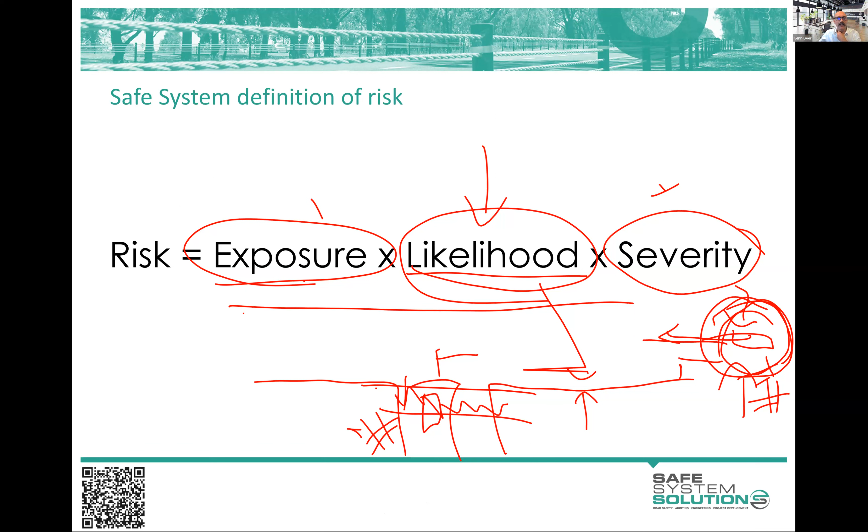I'm going to, in today's session, get you to do a little bit of practice on further categorization into exposure, into likelihood, into severity, because that is a really important part of safe system assessing. Now, have we got any questions that have come in there?

We do, Ken. We have Andy who would like to kindly challenge a theory. Having on-street parking, vegetation, etc., reduces the road width capacity, which sometimes reduces speed. Yep. Okay. That's true. It can do that. Things like narrowing roads can reduce speed.

Now, I suppose I'll do another example. If I go back to that intersection that I'd done, and we decided to signalize it. Okay, signalizing it. Some vehicles approaching here are going to see the orange, be stuck in the dilemma zone for a little bit, and then slam on the brakes just as a vehicle is coming out here, and they're going to hit it at a lower speed.

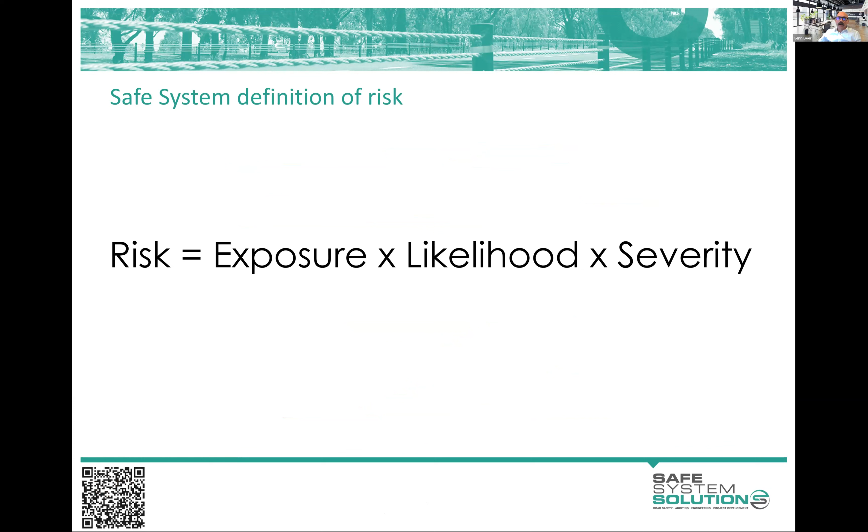Okay, any other questions or comments come in there? No more comments or questions at this stage, Ken. Okay. Well, that was very useful. And I think it's really helping to clarify in people's minds.

So remember, I did show, or maybe Max showed, this little thing talking about exposure and likelihood and severity, and complete removal of the ability for vehicles to enter removes the exposure if that vehicle crashes. So here we've got a level crossing. It's basically been closed. There's a mound of dirt here and a mound of dirt there, and that's a closed crossing. So there is no exposure because zero number of vehicles going through that area.

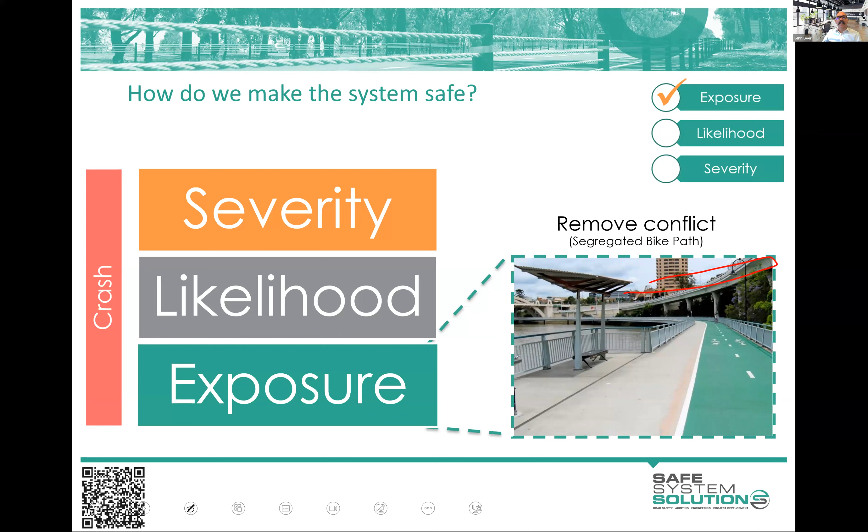And that complete separation is where we talk about changes to exposure, because there's no bikes exposed to vehicle crashes if you've removed all bikes, or you've significantly reduced the volume of bikes or pedestrians from the actual roadway. So if we look at some words around that, the measures of exposure are AADT, side road traffic volumes, number of motorcyclists, number of cyclists, number of pedestrians walking along or crossing the road. It's about the numbers, AADT. So just think always back to that.

Now, as I say, there's these bits and pieces you get into when you're safe system assessing that you wanted a little bit of clarity on, and over time, we've identified quite a number that are just not clarified in the Austroads Safe System Assessment Framework document and not clarified in jurisdictional guidance document supplements. So we've filled some of those gaps with these fact sheets, which help people get a bit more uniformity in their assessing. And Marissa, I'll get you to put all those into the learning management system so people can easily access them.

But we've got fact sheets on things like, well, how do you know whether a cyclist treatment is influencing exposure or likelihood or severity? Like, okay, if it's an on-road bike lane, that's fairly obvious it's likelihood. But what about if we put a curb separator there? Is that likelihood or severity? What about if we make a big hatched line marking between the traffic lane and the bike lane? Is that likelihood or is that exposure? And then what about if we go an off-road facility? Because there's a bit of scratching your head and thinking around that.

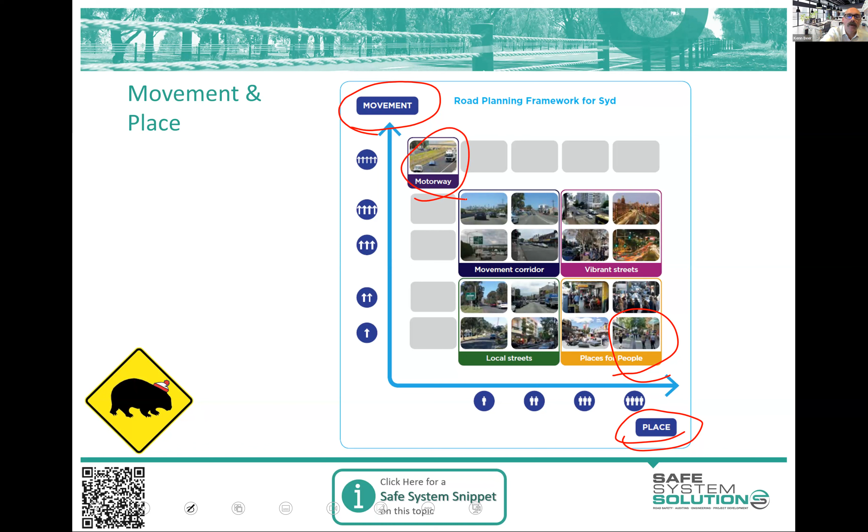So down here, we've got these places for people, or high place value areas with low movement requirements and function. So we want high interaction, trade, congregating in these areas. Right up here, we've got an easy example like a motorway, which is an absolute movement corridor. There is no place value to it. We're not trying to get people to hang out there, have a coffee, go for a drink, do their shopping, anything like that. And you won't create facilities to allow for any of that. So you can see there are two polar ends that are quite easy and understandable, but things alter and change. So I'm going to do a couple of little exercises to get people thinking and interacting, just to put some of this into place.

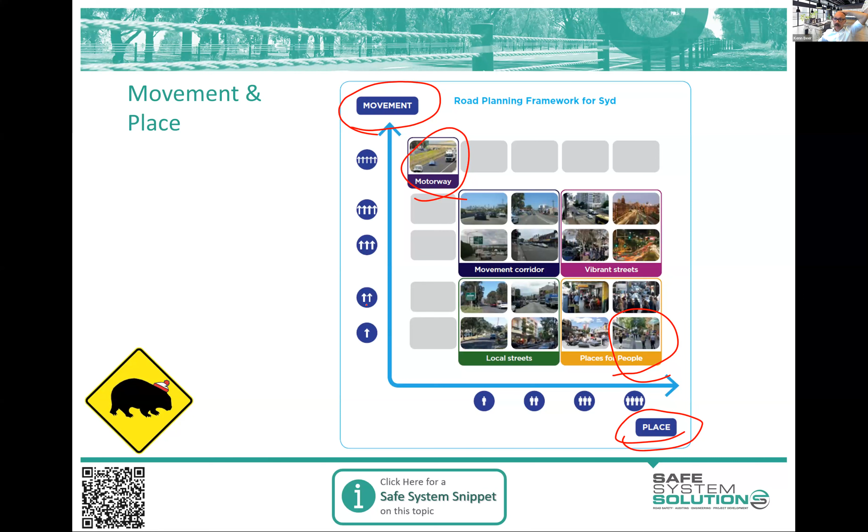So if we go down to the high place value area, high place, low movement, and we say, right here, we've got this current area and we're aspiring to make it that place for people, that high place value, doesn't have a major movement requirement here. What I'm going to get you to do in just a second is to type into the chat some ideas that you might have for how we could alter this road environment to increase the place value, acknowledging we're trying to make a place for people here.

But I also want, for anything you propose, for you to put exposure or likelihood or severity. And this is more practice on that categorization as we've been doing. So maybe if you were saying increase lighting in the area, you'd say likelihood: increase lighting, likelihood. Now, I don't know why you'd do that as a suggestion, but that's what I'm looking for. So I'm going to give you a good 2 or 3 minutes here to do that. And I'll let you pop it into the chat and I'll have a look as we're going.

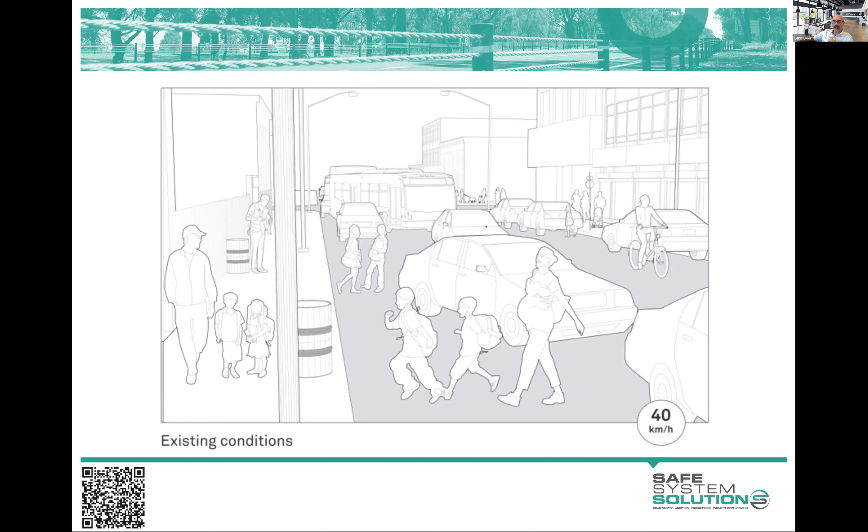I don't think they actually need a particular crossing there. The whole thing's kind of like a shared zone. So we've got that environment. And you're not going to be able to drive through there quickly. And that's not the point of the whole area.

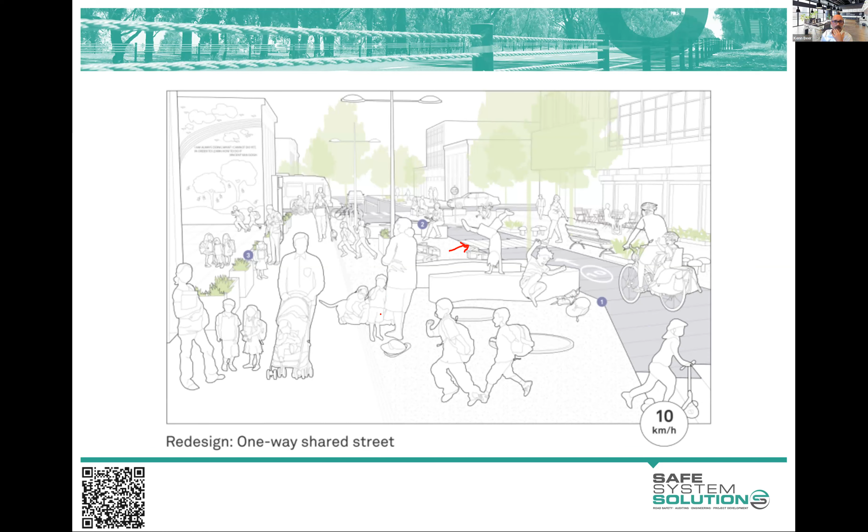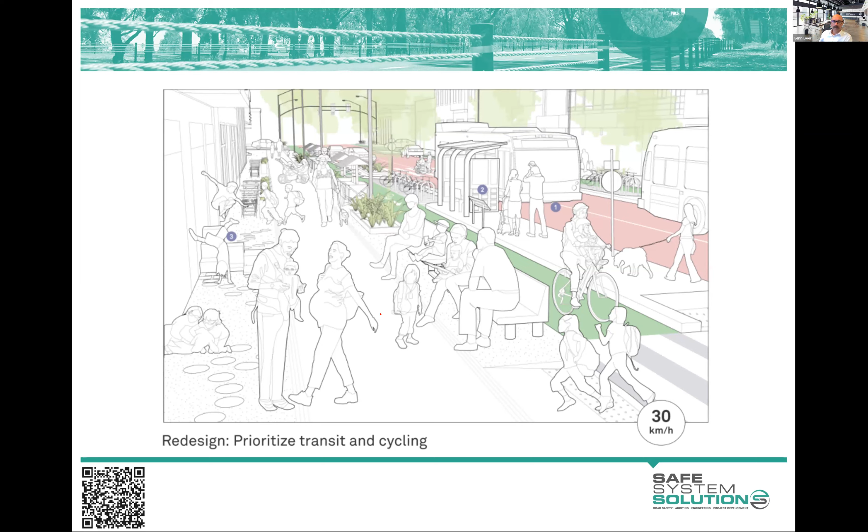When we're down at local street level, where we see low place requirements and low movement, we really can latch on to this particular low movement and reduce vehicle speeds through these areas. And there's no need to create or maintain speeds through these areas because they're the local environment.

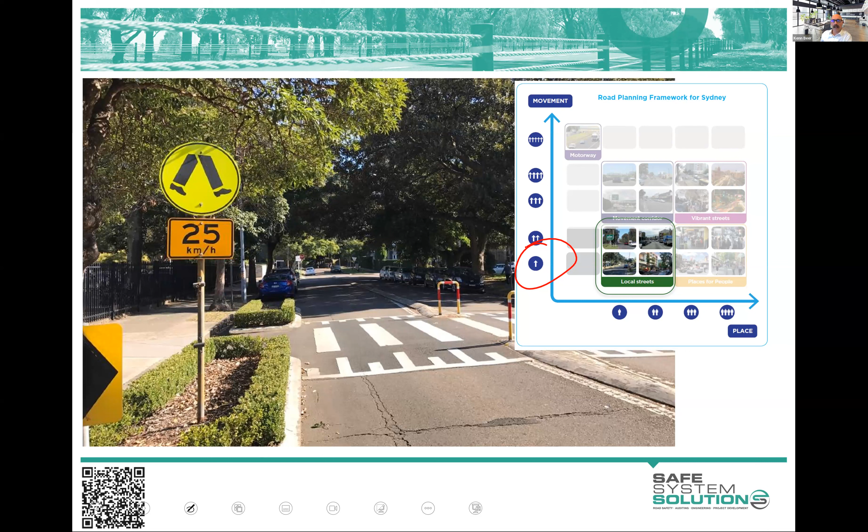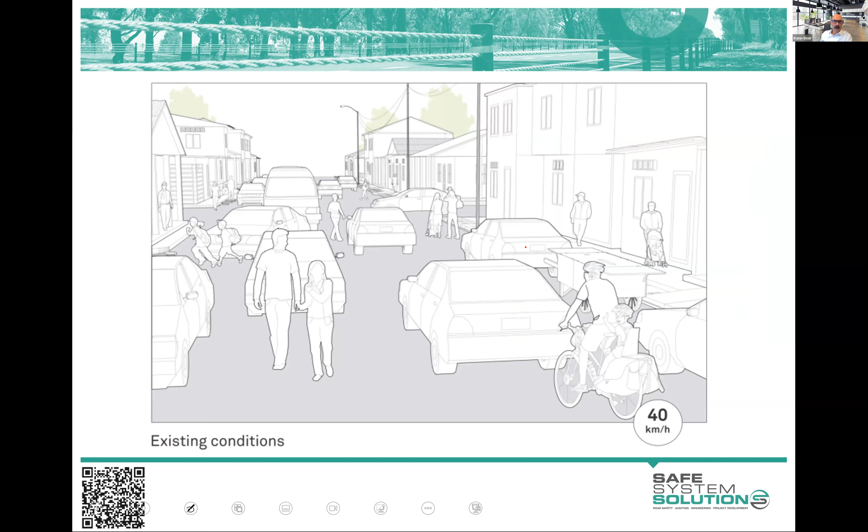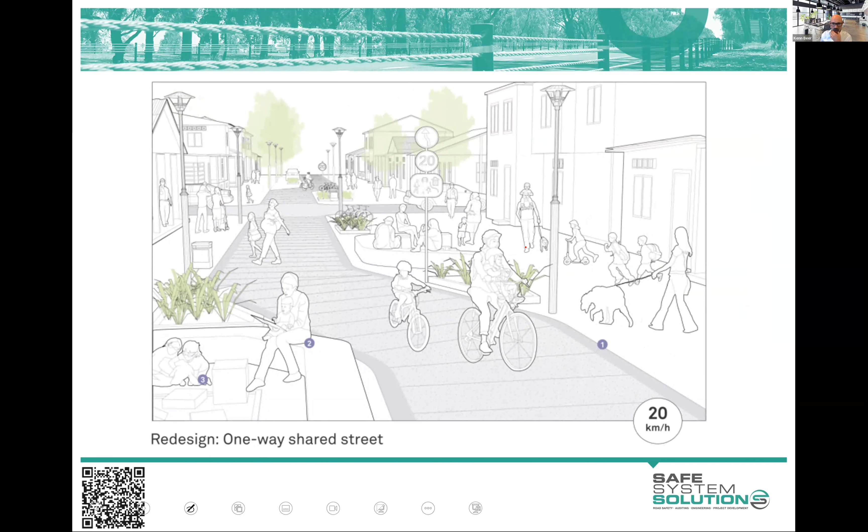So this is where our local area traffic management features come into play, and slowing vehicles as much as we possibly can. So again, artistic example here, it's a very high proportion of pedestrians and vehicles for this sort of area, but slowing vehicles through these areas is a good way to go. If we then get into some of the more challenging ones, I often say that everything's kind of easy in these ranges.

Because when you're up here, you're trying to maintain either cyclist speed through the cycleway or vehicle speed or the like. And generally it's kind of clear that way. Down here, everybody can be going very, very slow or not there at all. Down here, we're latching on to the low movement, so we can again take some of that and go in here. These ones are super challenging.

Why? Because people want everything. They want it to be often bicycle priority, ped priority, vehicle, major traffic movement, public transport. They want everybody to be safe, but they want everybody to get through there as quickly as possible, and they want it also to be a vibrant street with activity and trade and people out there.

So it's very challenging. But let's combine this one with your fill up a coffee time and a little bit of a stretch and the like. So I'll give you a proper 5 minutes on this one.

Same exercise, but where we're at here is we've got movement requirement for people and goods, and we've also got high place requirement. All right, so we're trying to change this into an area that's high movement, high place. So you can see there that's existing road. It's got lots of vehicles, lots of public transport, lots of pedestrians, lots of cyclists. It's got currently a pedestrian overpass and a bit of pedestrian fencing, 70 km/h environment.

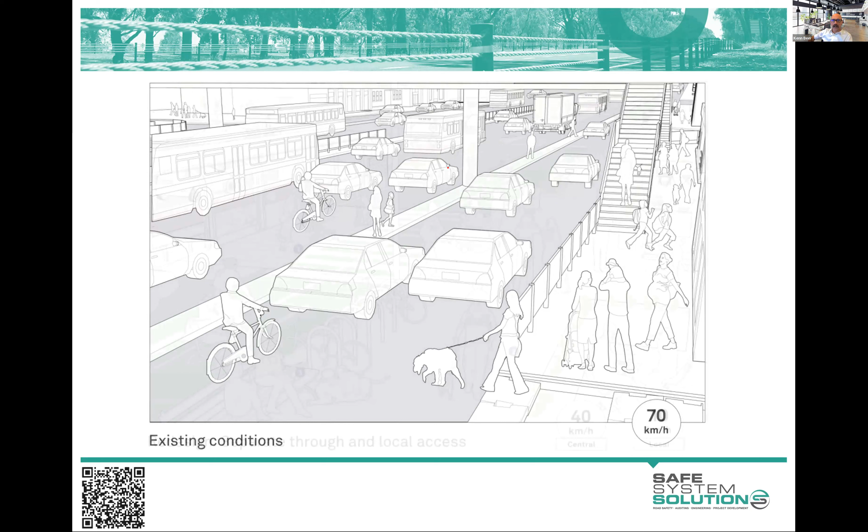So let's have a look at this. And yeah, so these are, again, artistic impressions, so don't get into the design detail of things, but we're looking at an area that has far more place value. It still retains movement through the area for all people and goods. Yes, okay, so cars may not have as free and abundant movement through the area, but we've been able to achieve movement through with buses, bikes and cars, and keep it reasonably flowing from the perspective of all road users. So you've got movement, you've got wonderful place value, and overarching all of this, you've got great safe system alignment with the vehicle speeds and conflict points and the interaction with vulnerable road users.

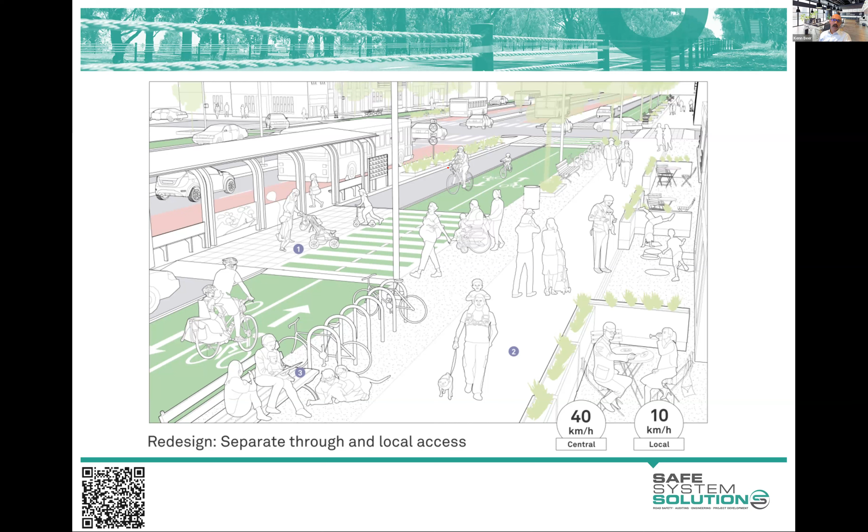So these are obviously aspirational things to look at, and you won't achieve these immediately and overnight, but there are decent examples around Australia and New Zealand of where these sorts of transformations have been able to play out. We know that through these signalized intersections, you can keep that separation, and signalized intersections in a lot of these high place, high movement corridors are what is there for one reason or another, but we shouldn't be dropping off our treatments at the intersection. So separated cycle facilities and the like are good.

And where we have these sorts of facilities, thinking about exposure or likelihood or severity, it can be a challenge. And I do refer you back to that fact sheet I mentioned, which helps clarify that. So in this one, for example, I would say that that's likelihood reducing. The installation of this sort of separated cycle facility, well, it's separating from vehicles. We know that a vehicle could easily drift out of their lane and enter that if they were distracted or dropped their coffee in their lap or fell asleep or whatever it was. They're probably unlikely to fall asleep in these urban environments, but you can easily mount those curbs and get in there and hit cyclists. But also those turns in and out are creating that conflict. So we haven't eliminated the exposure to vehicle to cyclist crashes. We've lessened the chance of it by providing these dedicated facilities.

Okay, so I'll just briefly touch on cyclists, pedestrians, motorcyclists, just to round out this session and get us ready to talk about exactly how you do a safe system assessment in terms of putting numbers in places and looking at sites and looking at designs and those sort of things.

But we know pedestrians and cyclists are most vulnerable road users. We know we get into sort of severe injury territory around even those 20 km/h impacts, and up at 50 we're in sort of fairly certain death areas where there's that direct strike for the bulk of the population. Young and old even more vulnerable, and ideally we want to manage speeds to within around that 20 km/h where the interaction happens between those vulnerable road users and vehicles. Otherwise we want to sort of separate that.

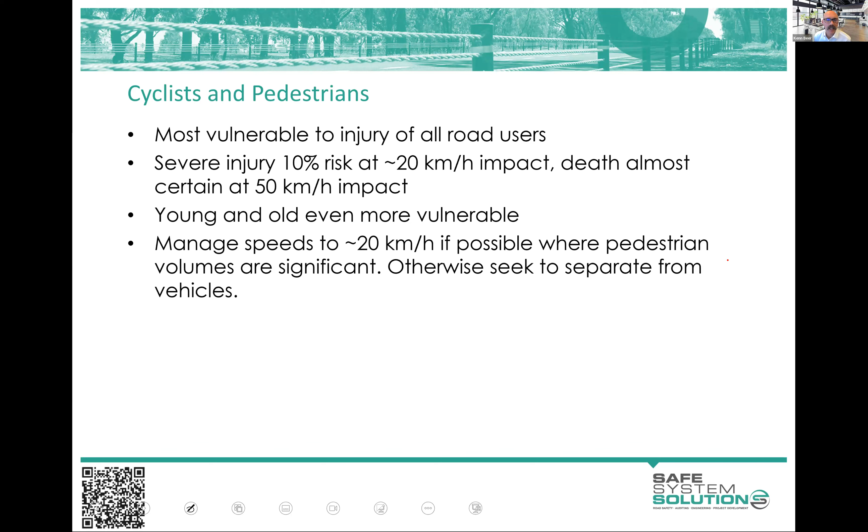Now we're moving along towards that, but from the safe system assessment perspective, you can keep some of this in mind, and we can think about how we go about that. So again, like for cyclists, we're thinking about, can we provide that separation if speeds are up? Can we either eliminate exposure by doing this if there's not the entry and exits and crossing points, or lessen the likelihood of crash of vehicles entering these areas and hitting cyclists?

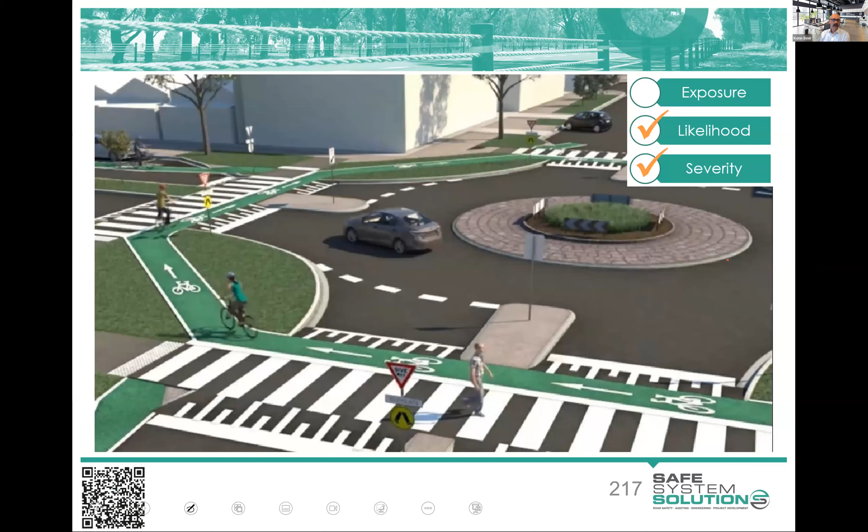Yeah, certainly this may encourage more people to cycle and the like, which is great, but that from a safe system assessment perspective isn't really too much of our concern. Certainly that may set us some context in recommendations, but not from how well aligned with safe system principles this is. We do want to think about the intersections as well and the challenges there, but there are some good emerging treatments that really help pedestrians and cyclists at roundabouts, for example, or even signalized intersections in terms of safe system alignment.

I do like the separated protected roundabouts for pedestrians and cyclists, where we've got slowing of vehicles on the approach to the conflict points. We've got priority for pedestrians and cyclists through the roundabout, so they don't have to wait for the vehicles. And we know these are addressing both the likelihood and severity of crashes for all road users at these sites. And that's the Moray Street one down in South Melbourne.

So you can see there, it's going to be a much better aligned safe system area because we've reduced the likelihood of crashes with pedestrians and cyclists and the severity of crashes. So we get that good alignment. It's going to be much better aligned with safe system principles for vehicles as well, because it's all slower and the like. It's harder as we increase the movement function of these roads and roundabouts and the like. And you get yourself in challenging territory, especially 2-lane roundabouts and how you might deal with them.

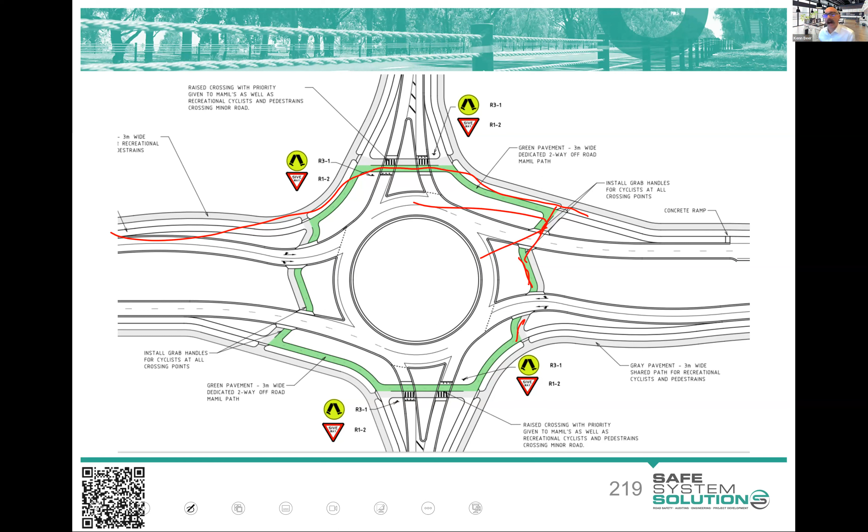But if it was designed that these are at grade and crossing points, the angle and the squaring up and those sort of things is trying to lessen the likelihood of crashes by having good ability for cyclists to see and then to stagger and to make those choices. So trying to address the likelihood of crashes through some of that design as well.

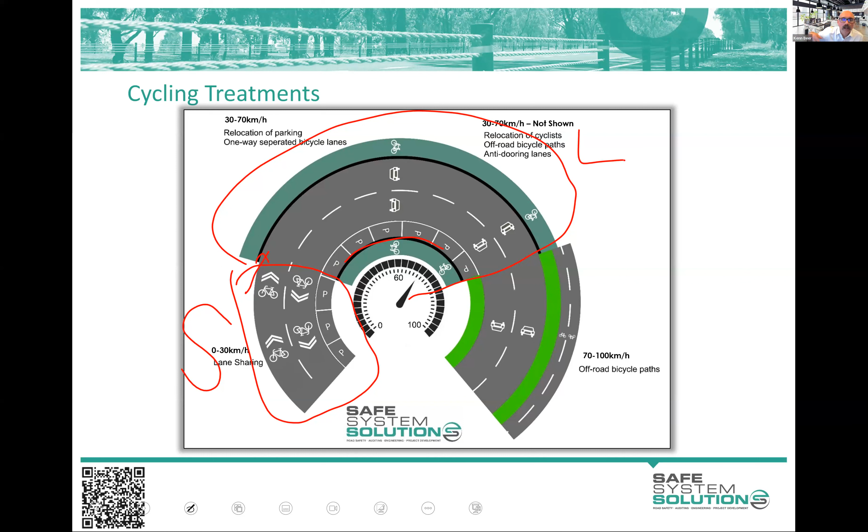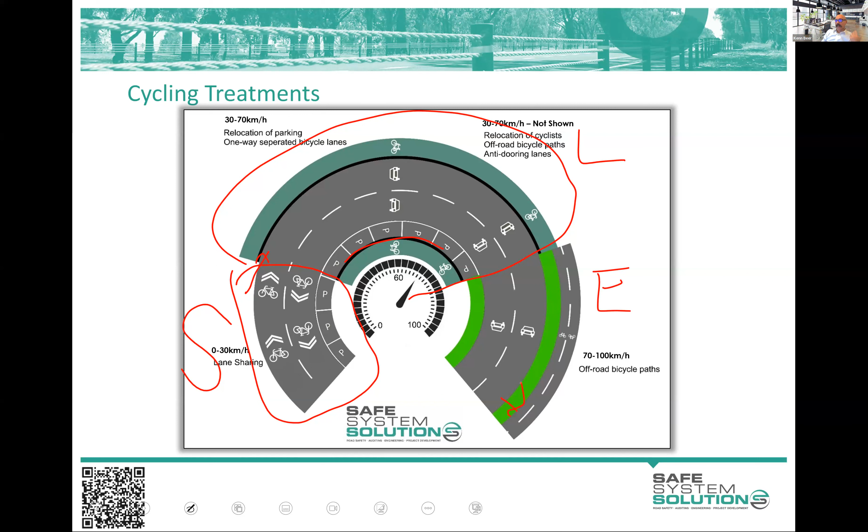So most of the time we're still saying there's some crash possibility. The likelihood has been low or close to eliminated. And then we're in the real exposure where we've got physically fully separated off-road shared path or off-road bike facilities quite set back from any roads, and that's really an alteration to the exposure to crashing. So a bit of a way to think about some of the cyclist treatments and how we're getting those reductions.

So if you've got an area where you have pedestrian priority, a zebra crossing, so without the raised bit to make it a wombat crossing, a zebra crossing itself, that's really not a road safety treatment. The reason for that is the severity of any incident isn't reduced, and likelihood is arguable and very case dependent. But pedestrians will have priority, of course, at a zebra crossing, and will often cross and are less alert to cars because they've got the priority. So we see some pretty high severity crashes happening at zebra crossings, and it's really not a road safety treatment.

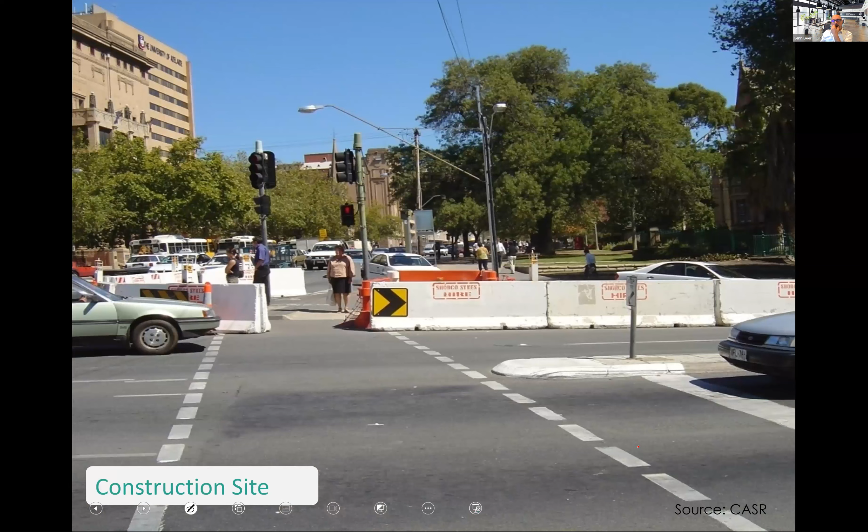I'll just do this little story and then I'll see, Marissa, if there's any questions that I need to deal with. But this to me is an example of where we have very good knowledge about what creates a safe system road environment for pedestrians. The reason I say that is this is in Adelaide, quite a while back, but there's some work happening in the island down here, and a couple of workers are in that area for a week or two, doing electrical stuff and then some civil works. So we've got workers in this area.

So the speed limit on the main road was 60 and reduced to 25 kilometres per hour, which is the South Australian work zone speed limit. In other jurisdictions, it'd be 40. But a reduced speed limit for vehicles, plus the barriers, because the workers are in there and a vehicle could still leave the road and enter that area. And so they go about doing their work and they finish their work, and then all of those barriers are removed and the speed limit goes back up to 60 kilometres per hour.

And then like 3,000 pedestrians a day stand in these areas crossing the road. Okay, same physical form, same tolerance to energy, yet we are protecting one, but not the other. And some people might say, well, the workers are concentrating on their work, not on the road. And I would say the pedestrians crossing are concentrating on their phone, not the crossing task, or they're intoxicated, or there's a lot of reasons they're at higher risk as well.

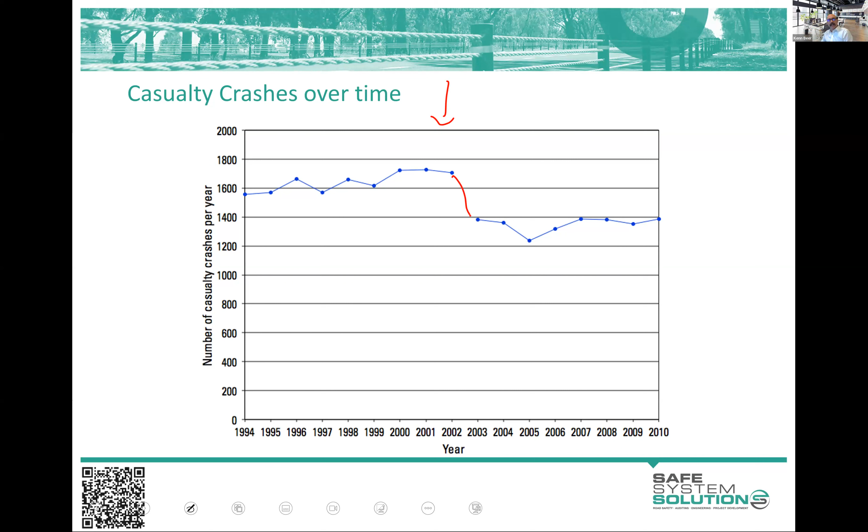In terms of regulatory speed limit reductions and speed limits in urban areas, it's a really wonderful approach to giving us better alignment with safe system principles. I pop this up because it's a quick way to show some of the impact. That's when the default speed limit got changed from 60 to 50, and you see the casualty crash rate significantly dropped there in one year, a step change really. So it shows you the huge change that can be achieved.

Okay, so pedestrians and cyclists, we had a bit of a chat about that. We could talk for weeks about all of that and all of the treatments and the design things, but it's more about ensuring that we've got our head around some of those, like the amount of force these different road users can take, and some of the features that are influencing exposure and likelihood and severity. And so let's finish off by just talking about motorcyclists and the same sorts of things.

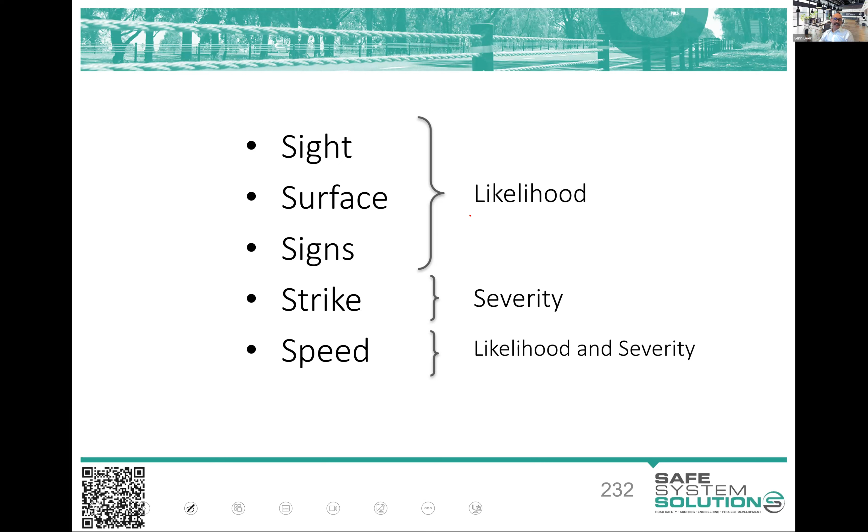And anybody who's done the road safety audit course with me, you'll remember I talk about these 5 S's for motorcycle safety, which are sight, surface, sign, strike, and speed. And if we're looking at those from that likelihood and severity perspective, we know that the sight and the surface and the signs are all influencing the chance of motorcycle crashes. When they're crashing, what they're hitting and how they're hitting it, that's a strike. That's the severity. And the speed is both likelihood and severity, that factor that can influence both.

So when we've in the past been looking at severity of motorcycle injury, we've often just lumped motorcyclists with cyclists predominantly and said, well, they're a vulnerable road user, that's the severity we're expecting. But after the release of this 2019 research by a number of people, including my colleague Johan Strandroth over in Sweden, who was part of this fairly comprehensive study around motorcycle crash injury risk, we see that motorcyclists are up from cyclists in terms of forces they can handle from different crash types. They are down from cars. So cars in the same crash types, you've got the shell, you've got crumple zones, you've got seatbelts, you've got airbags, they're all playing. Motorcyclists sit somewhere in between.

So through reading that research and also understanding what the motorcycle fleet is, it's, to me, partly also due to the stature and health of the people that ride motorbikes that are involved in motorcycle crashes. They tend to be of a higher order biomechanical stature, so they can handle some more force than pedestrians. Anyway, there's some interesting stuff in there, which I'm not going to go into detail, but I just thought I'd point out that motorcyclists sort of sit somewhere in between.

The surface is highly important for motorcyclists in the likelihood of crashes because riders lean when they go around a curve or a corner. They've got 2 small contact patches. They've got a center of gravity that shifts, taking that force. So if you've got flushing or bleeding or potholes or gravel on the road, or mud, anything like that, and that side traction's lost, you're more likely to see motorcyclists crash than other road users. Cyclists have similar troubles, they're just often not traveling at the speeds.